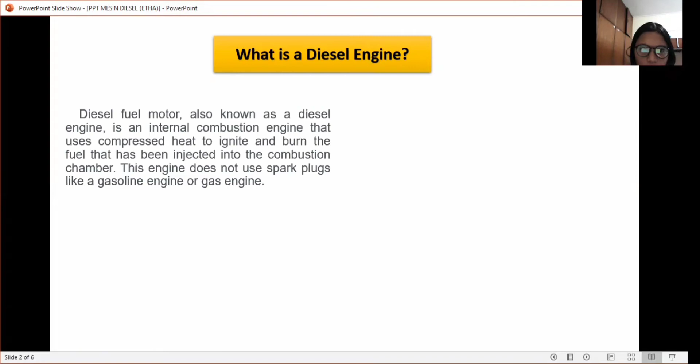Diesel engine working principle: the diesel engine works by utilizing high temperature and air pressure with a very high compression ratio so that they can burn diesel fuel. Therefore, diesel engines do not rely on spark plugs in the fuel combustion system.

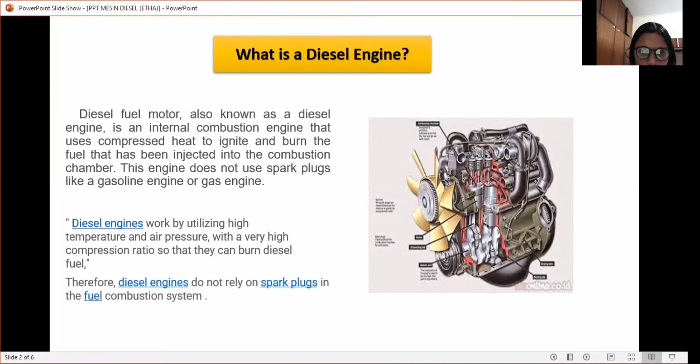Four-stroke diesel engine and its working principle. Inlet stroke: at the time of the intake stroke, the piston will move from the TDC upper dead point position to the TMB lower dead point position, and the inlet valve will open while the exhaust valve closes.

As a result of the movement of the piston from TDC to TMB, the volume of the cylinder space will increase and cause a vacuum in the cylinder space. At the time of the suction stroke, air will be sucked into the combustion chamber as a result of the vacuum that occurs in the cylinder chamber.

Next, compression stroke: at the time of the compression stroke, the piston will move from the TMB position to the TDC position, and the inlet and exhaust valves are in the closed state. At the time of this compression stroke, the air in the cylinder chamber will be compressed by the piston so that it will increase the pressure and temperature in the combustion chamber.

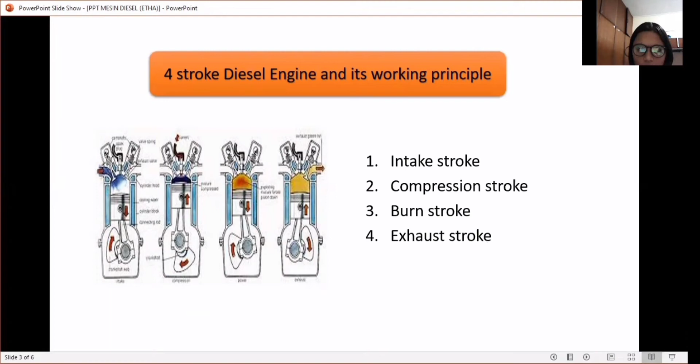Exhaust stroke: at the time of the exhaust stroke, the piston will move from the TMB position to the TDC position, and the exhaust valve will open while the inlet valve is closed. At this time, the combustion gas will be pressed out through the exhaust valve by the piston.

Number 3, fuel filter, generally has two parts. Normally the part before the feed pump is equipped with a water sedimenter, which functions as a water separator in the fuel system, and the fuel filter, which functions to filter dirt from the fuel.

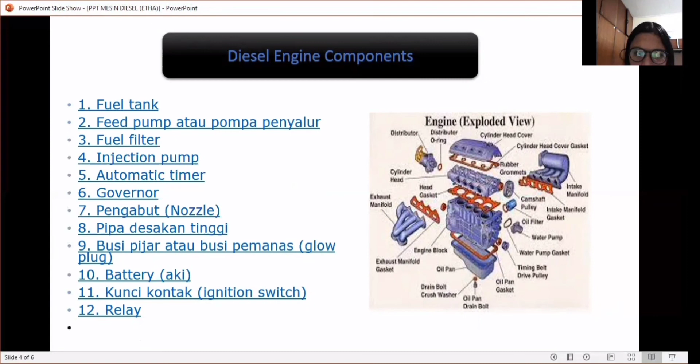Advantages and disadvantages of diesel engines. Advantages of diesel engine: diesel engine torque is very large, much more fuel efficient than a gasoline engine. Not too worried about breaking down because the electrical components in the machine are few. The engine lasts longer than a gasoline engine if properly maintained.

The latest diesel engine technology, with common rail and variable turbo, is fun to drive and thrilling.

Disadvantages of diesel engine: the sound of the diesel engine is not as smooth as a gasoline engine. Fuel sensitivity for diesel engines with common rail technology. The power at high altitude is inadequate. The price of spare parts is more expensive because the quality of the material is higher.